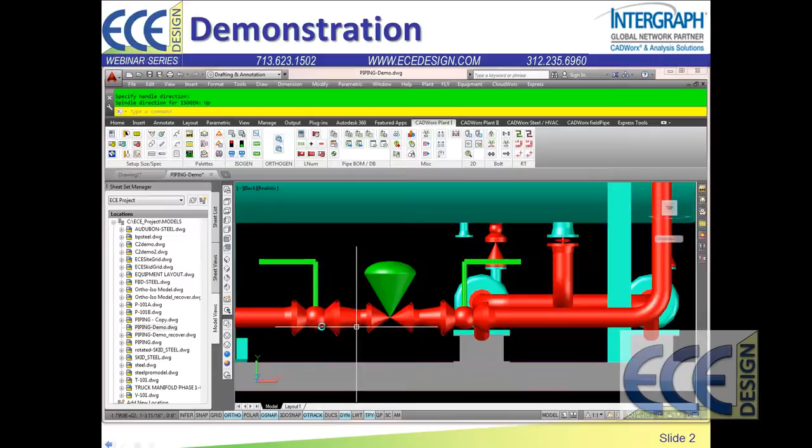One of the reasons I didn't worry about the location of this control valve when I inserted it in the line: I just gave myself plenty of room. I really would like it as close to this standpipe as possible without interfering with the saddle or the standpipe. So I'm going to select this

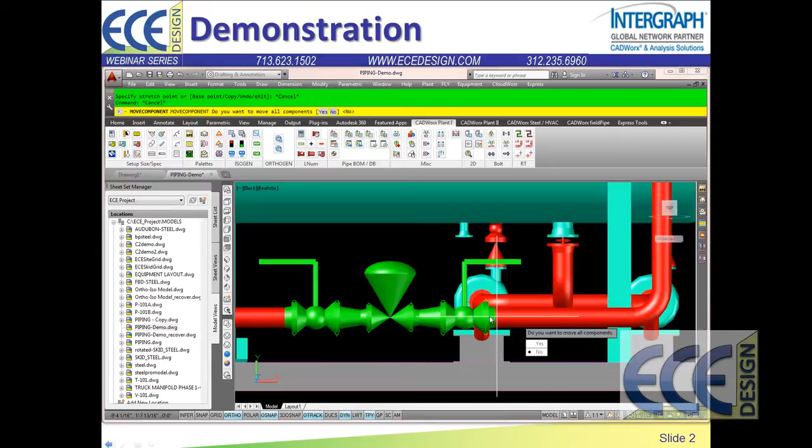flange and I'm going to hit the grip on the butt weld connection of it, and the system actually reads that these components are all connected, so it asks if I just want to move the flange or would I like to move everything. Yes, I want to move everything, and now you can see I have a dimension line going from the end of the pipe to the butt weld connection of that flange.

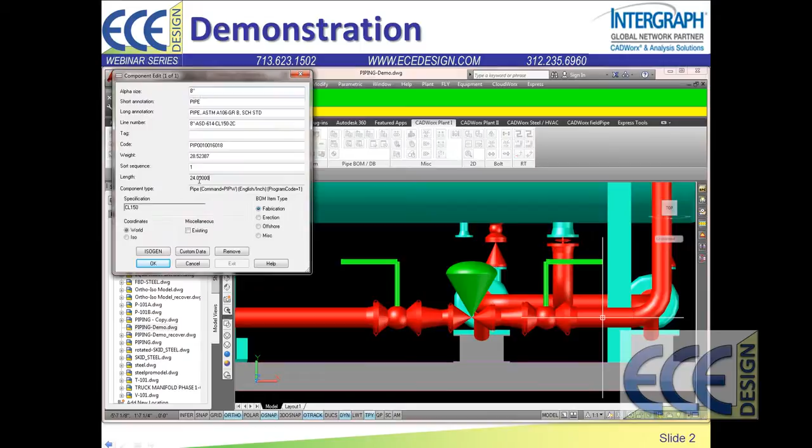So if I want, I can actually key in a precise length of pipe. I notice that around 2 feet is going to be perfect for me here to clear that saddle. So I'm just going to use a 2-foot piece of pipe there and type in 2-foot dimension, and that gives me my 2-foot piece of pipe at that location.

Alright, let's go ahead and put our bypass in here. To do that, I'm just going to select this vertical run of pipe and hit the plus grip. That will give me a T, which is not actually what I want. I want an olet here, so I'm going to right click and go to the component list again, and then I'm going to select my olets and use a weldolet, and I want an 8x6 olet here.

Now it's dimensioning from the top end of the pipe. That's not really where I want to dimension this from. I want to go a component distance from this elbow, and it's going to the corner, and that's what I want, so I'm going to accept that and then tell it I want it to be 5 foot from the corner of the elbow by typing in 5 feet.

Now I can turn the olet the direction I want it to go, and I'm running pipe automatically. And here I can see that somewhere between 11 and 12 feet gets me out past that hand wheel, so I'm going to go an even 12 feet this direction and use just a standard AutoCAD perpendicular O-snap to go perpendicular to this piece of pipe.

Now that I'm connecting the system, since these are self-aware components, it reads that I'm connecting 2 pieces of pipe, and it says, okay, what kind of branch connection do you want to use here. And if I select an olet, it filters it down to the 2 sizes that I've got selected. So select my 8x6, and I've got my olet in there.

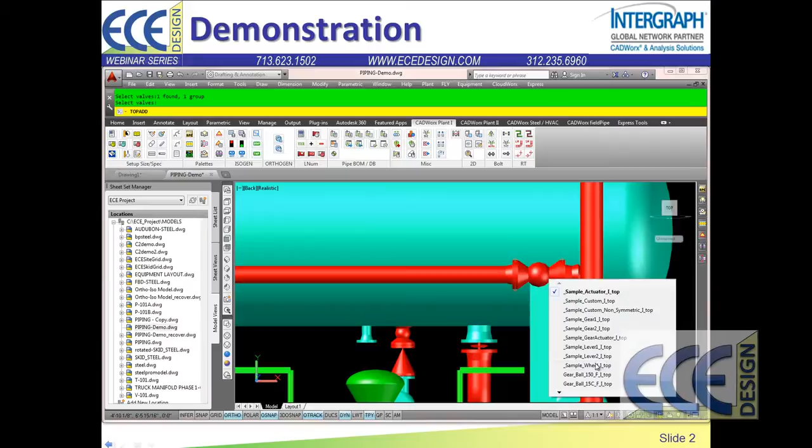Now we'll come in and select a globe valve for our bypass valve. Just hit a near O-snap again and slide this down, fitting makeup against my olet here, and then select my operator for that bypass valve. I'll use a wheel operator and just have it come directly out towards me here. Rotate around a little bit so I can hit the O-snap direction I want.

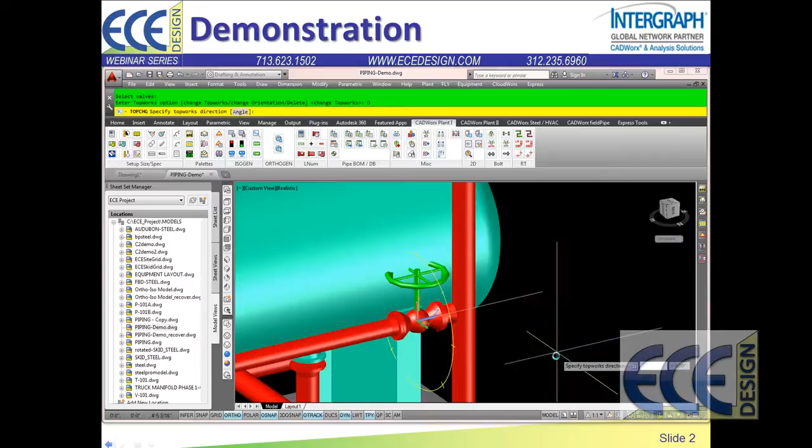Oops, picked the wrong direction. That will show you how easy it is to change the orientation. I can do a topworks change here and then just change the orientation and pull it over the direction I want it to go. So it's quick and easy to make those kind of changes as well, which of course is going to happen throughout the course of the design process.

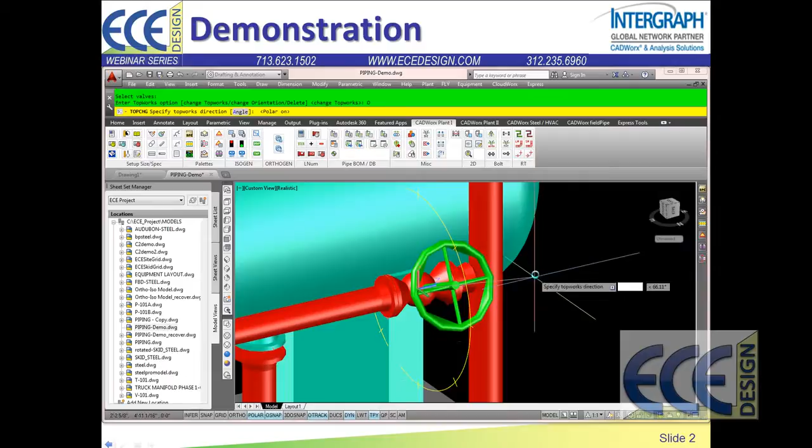You can rotate these. You notice when I did select this orientation, I have the AutoCAD compass turned on, so I could go to polar settings and snap this around a polar direction based on my polar snap settings, or specify an actual input angle if I wanted to here as well, and that will also show up on the isometric automatically. Okay.

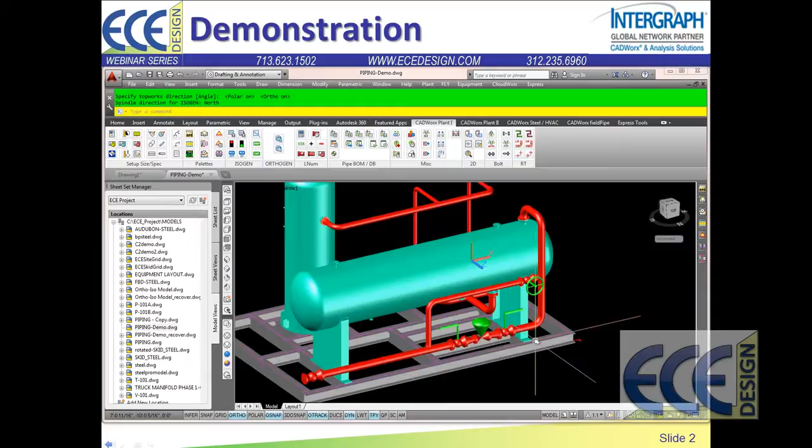Alright, finally let's go ahead and put a support on this line. We'll just maybe pop a couple of supports in here real quick. I'm going to put an elbow support on this end of this pipe.

Pipe supports are built into the specification in CADWorx Plant Professional. They're built into the catalog, just like any other piping components. And in the 2014 and above versions, they are self-aware components as well.

So if I come in here and select the type pipe support I want, maybe you see here we've got the ECE pipe supports. These come in the ECE supplied catalog for CADWorx, which is a significantly larger catalog than what comes out of the box with CADWorx, and we'll take a look at that in just a moment as well. I'm going to use a type 37 pipe stanchion saddle.

I want the elbow floor stanchion, and you'll note here that I have the detect steel checkbox checked. That means the system will go look for steel above or below the pipe, and when you insert the support, if it finds steel in either direction, it will automatically snap that support to that steel.

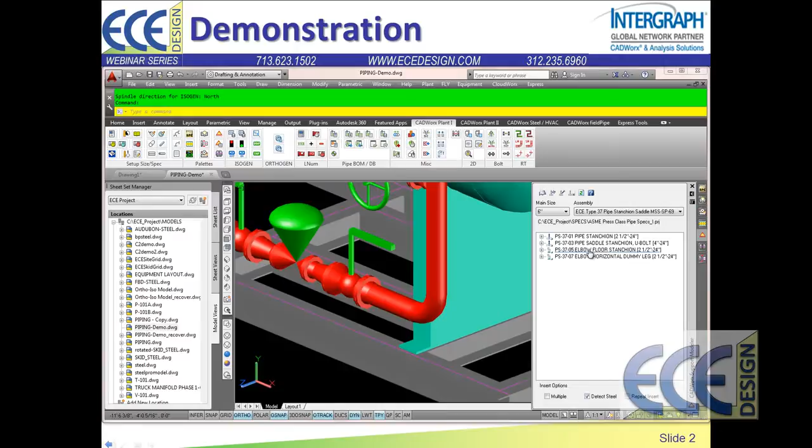So I want to select the elbow floor stanchion. I'm going to go ahead and pick this elbow here, and the system just automatically snaps that floor stanchion to the top of steel there.

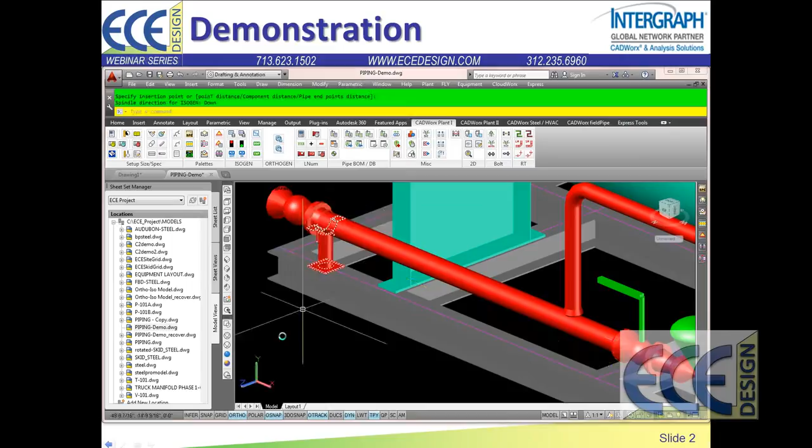If I pick another support, maybe a pipe stanchion with U-bolts, and let's just put it out here on this end of the pipe, and I pick my connection point, then it snaps all the way down to the top of steel there as well.

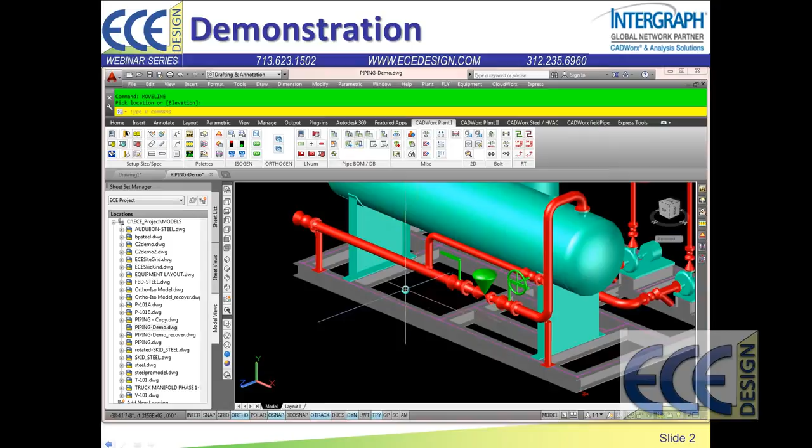Okay. Now if I move this pipe, let's say we want to slide it up just a little bit here. Oops, picked the wrong point there. You'll note that the supports automatically updated based on the changes I made to the pipe they're connected to. So they are self-aware as well. I'm going to undo that back to the location I wanted it.

Now obviously the fruits of all our modeling effort here, the benefits of that modeling effort is a great deal of automation. Automatic bill of materials, automatic isometrics, and now with Orthogen, automatic orthographics. So very quickly I'm going to use the isogen batch function.

CADWorx allows you to output ISOs in batch or individual mode, isogen out or isogen batch. Isogen batch allows you to select one or more process lines, and the system will go out and batch out and generate all the ISOs for those lines, breaking them when necessary based on your isometric style.

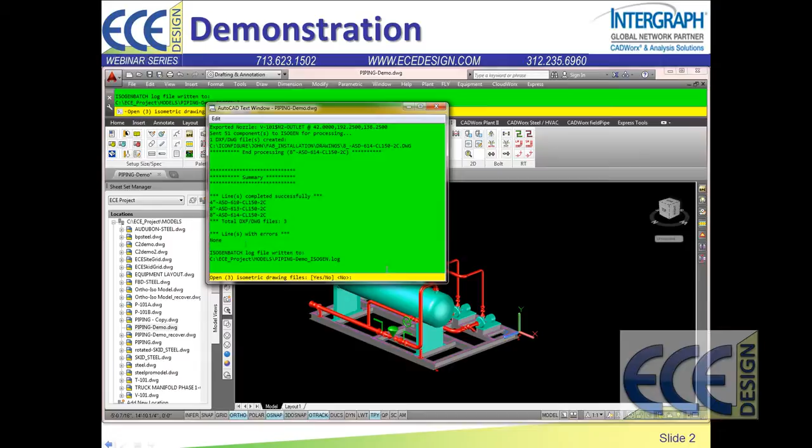Look at the text window. In this case, all 3 lines completed successfully, no errors, and it created 3 isometric drawing files. You want to open those? Yes, let's go ahead and open those to take a look at the results of our modeling effort, and we get 3 very clean isometrics with connection information to the equipment automatically.

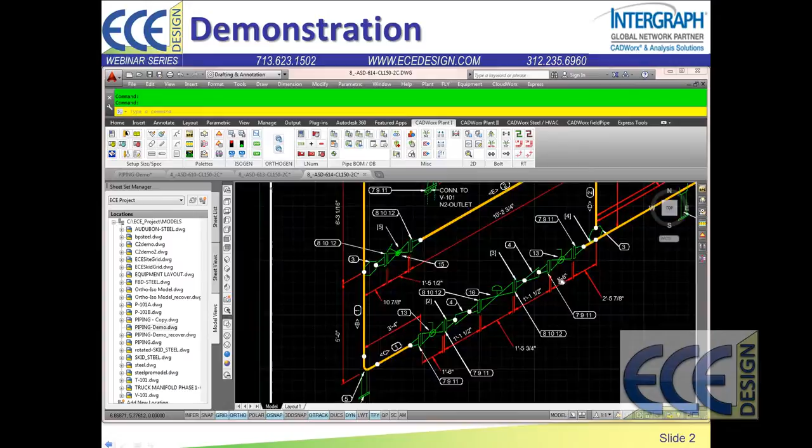Our TopWorks orientations are automatically annotated on the lines, of course fully dimensioned based on our isometric style settings, complete bill of material, and a cutting list in this particular style. And of course there's any number of options that you can select with isogen.

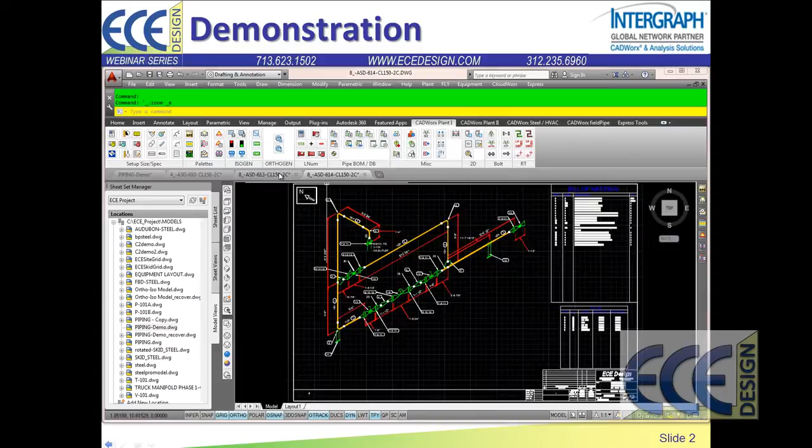CADWorx has got a very robust implementation of isogen, so there's a great deal of automation that we can get from the system without having to do any cleanup on the ISOs at all. So very clean set of isometrics automatically generated.

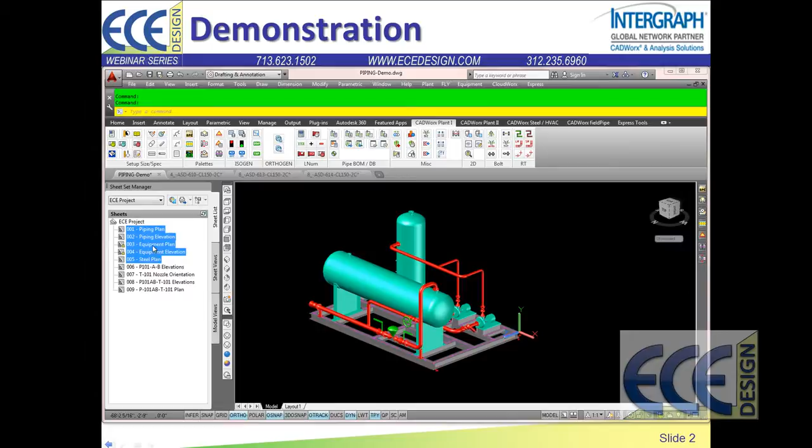We can also produce orthographic drawings from this model. There is a new add-on to CADWorx called Orthogen for CADWorx. Got some videos on that out on our website as well, just to show you very quickly how fast this system can annotate orthographic drawings. I'm going to go ahead and open a few sheets here that have been set up with M-views showing what I want to annotate on these particular sheets.

And let's start with the piping plan drawing here. I'm going to run Orthogen against this. Again, this is an add-on from a company called 3DS based in Houston. First time I run Orthogen, it's got to install the application, then it's going to ask me to select the style, very much like Isogen. This is a piping plan drawing, so I'll use this style.

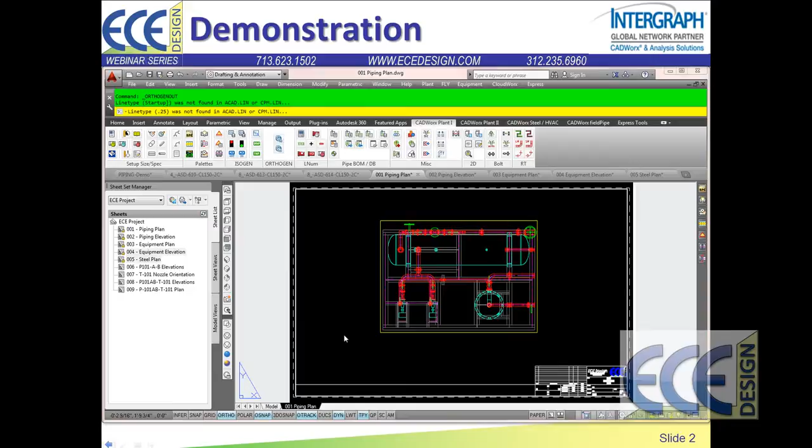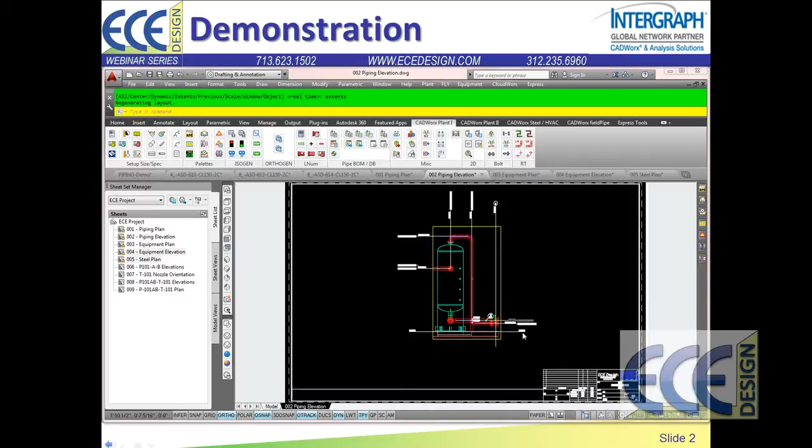And after the system is loaded the first time, then it very quickly will dimension and annotate these orthographic drawings for us. So there's my fully dimensioned and annotated plan drawing. Go to a piping elevation, run Orthogen again on it, and we'll select an elevation style. This will give us our piping elevations on it.

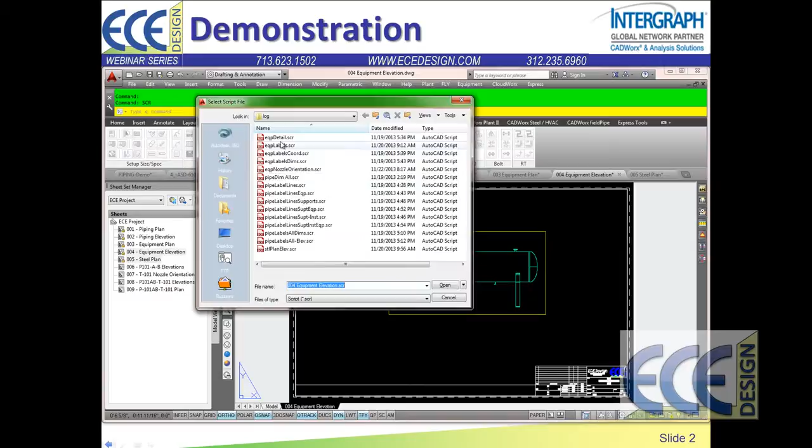Move to another equipment plan and select yet another style. I've got one set up for equipment details. Another equipment elevation drawing here, and we'll use that same equipment detail style for it. And then finally a steel plan, and we have a style set up for structural that will dimension and annotate the structural the way I want it.

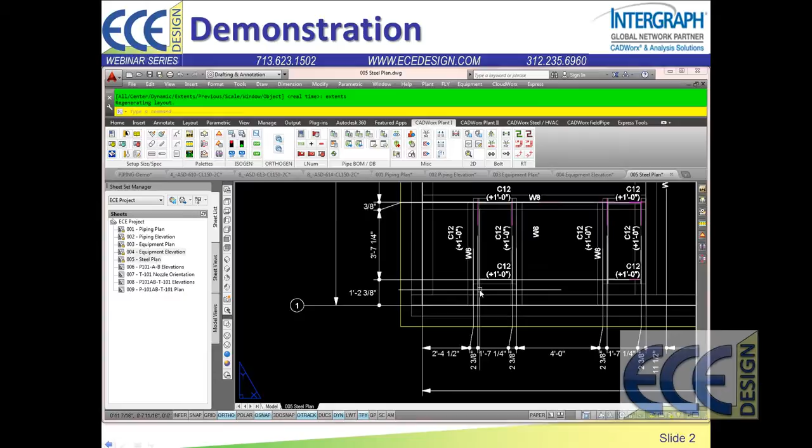Okay, so very quickly we can get our dimensions and annotations. This is style driven, so there's a ton of switches that you can turn on and off and manipulate to define how it's dimensioned and what text styles and colors, etc. are used. So Orthogen for CADWorx, the first AutoCAD based plant design system with Orthogen implemented.

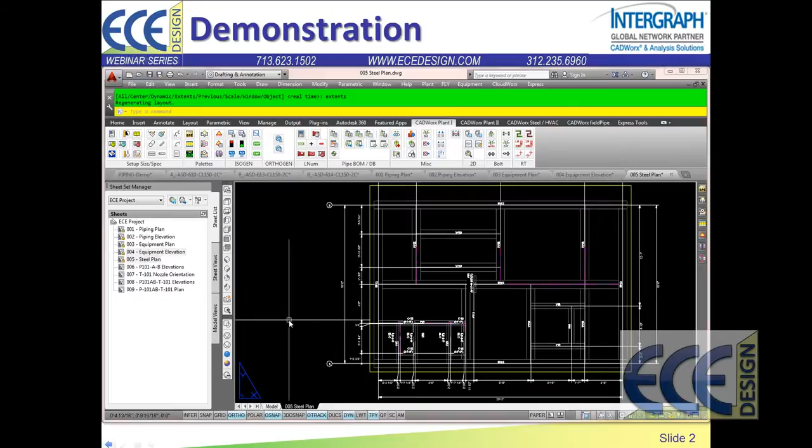Very quickly I want to show you how easy it is to set up these sheets using Sheet Set Manager and view boxes within CADWorx. Let me go ahead and open the model I'm using for the orthographic drawing production here, so you can see how we utilize the view box command in CADWorx. This lets me define 3D cubes around the items that I want to set up drawings for.

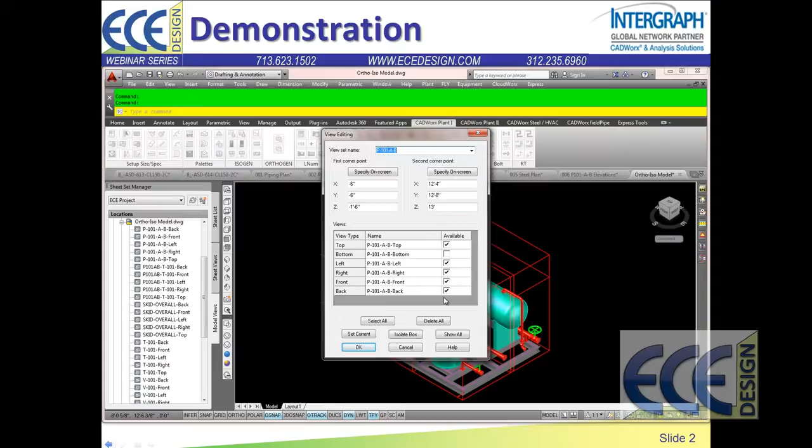So if I double click, you can see I've got a view set with a specific name. This is for the P101 AB pumps and the connected piping. I specify the corners of this and the lowest and highest elevation, select which sides of the box I want to create named views of, and say OK. Then these show up as named views in that orthographic drawing.

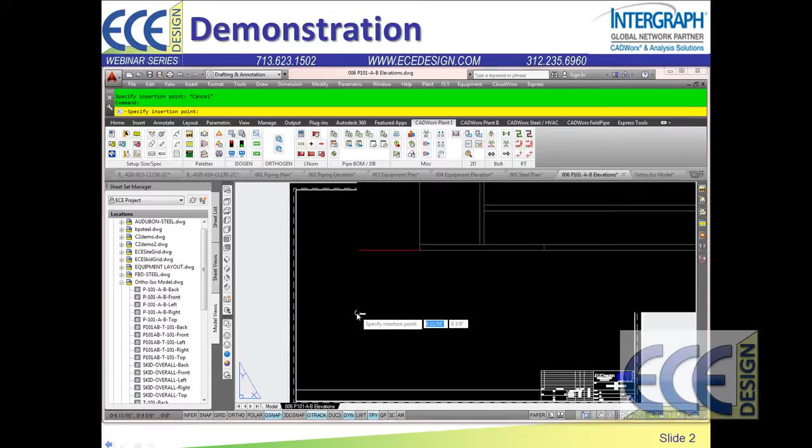So then I can come over to my sheet for this elevation set of drawings, P101AB, and I can just grab the right one here, drag and drop that front elevation. The sheet set automatically takes care of the X reference file, so I don't have to worry about that. Right click to select the scale I want it on the sheet, place it where I want it on the drawing. I have a label defined to automatically go in there as well.

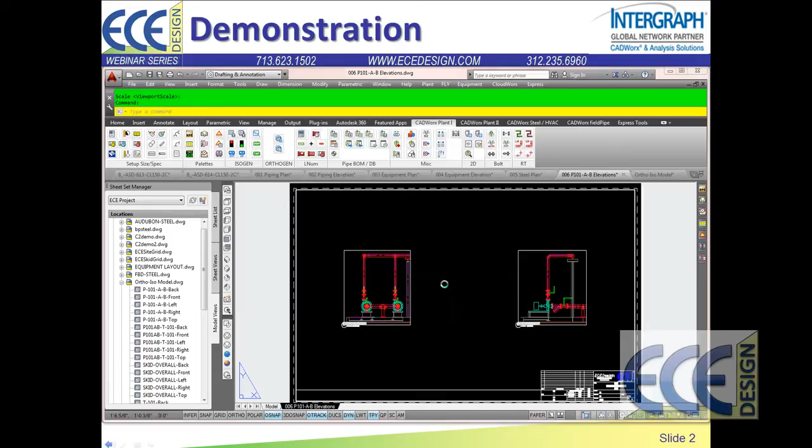And then I can grab another view, maybe the right side view, and right click to set the scale. I'm going to insert it here and then just align it with that bottom of the other view so they're aligned properly, and then quite simply run the script file for those views, in this case an elevation style, and it will dimension and annotate both views very quickly.

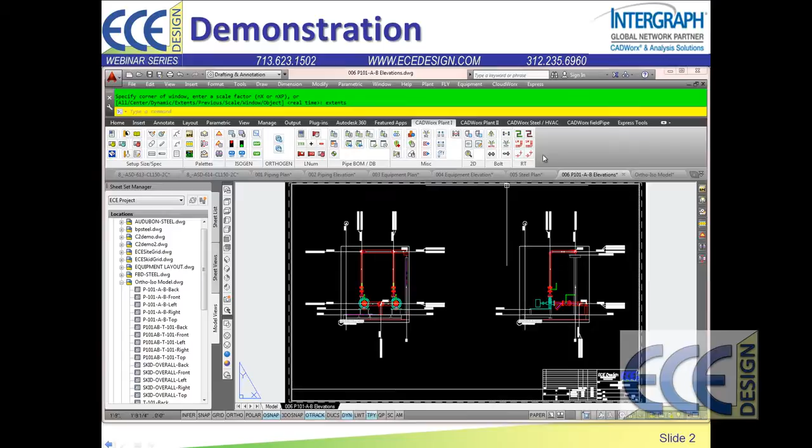So that's Orthogen for CADWorx, which again is an add-on to CADWorx Plant Professional. This is not included with the shipping product. It is an optional item. All right. That's it for today's session for CADWorx Plant Professional pipe modeling.